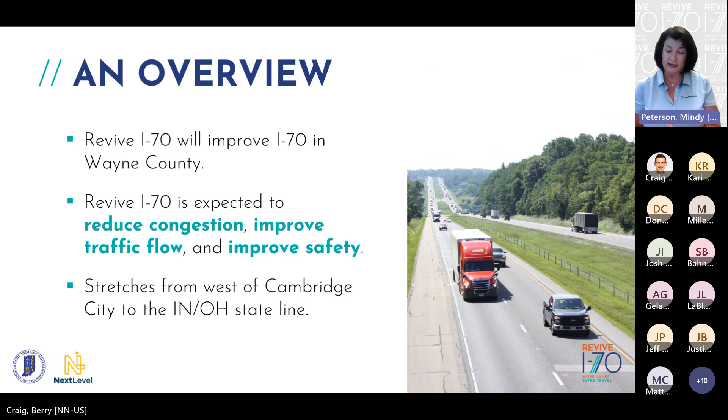So we want to give you an idea of where we are with the project and what we're talking about. When we talk about Revive I-70, we're talking about a project that, bottom line, is going to improve I-70 in Wayne County. So we're talking about added travel lanes, wider bridges, improved bridges, all things that are going to improve your commute, improve traffic flow, and improve safety.

Some of those improvements are outlined right there on your screen. We're talking a lot of bridges in this project area. We said it's a large project area, and we have 41 bridges that have improvements identified, and they kind of run the gamut. We have some really serious ones, a replacement of a bridge. We have some rehabs, some painting of bridges. John is going to walk through what those improvements look like.

And we have a lot of widening. So we're going to talk a little bit more about that added capacity and what it's going to look like, and where we know for sure that an added lane is going to be going, and where we are still identifying improvements. And then other things on the list as well.

We have pavement replacement, we already talked about that. Pavement in this area really needs some attention, and so that is certainly something that our project team has been taking a look at. Drainage improvements, very important. And then just things that are really going to enhance the drive along this corridor: better lighting, signage, guardrail, those barriers. So all things that the team has been looking at.

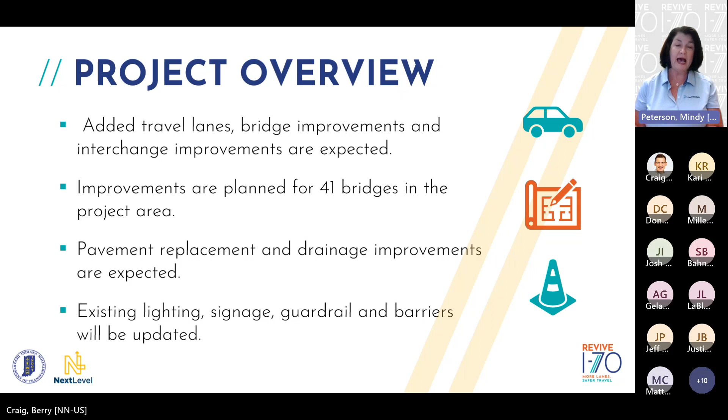Also want to talk about where we are in the project. We're in the environmental and design stage, so we're kind of zooming out and looking at the big picture here. As I said, we started our work in earnest early this year. A lot of coordination is involved with a project of this size. This is a major project, as I said, it's a big investment. That coordination is happening with local, state, and federal officials. I see some of those local officials joining us tonight. I mentioned that we have some federal highway folks with us as well. So there is a tremendous amount of coordination that goes on with a project like this.

Input from the public is important. So please don't shy away from sharing any feedback, using that chat function, or using comments sent to us through the website. That feedback is very important and helps inform the development of this project.

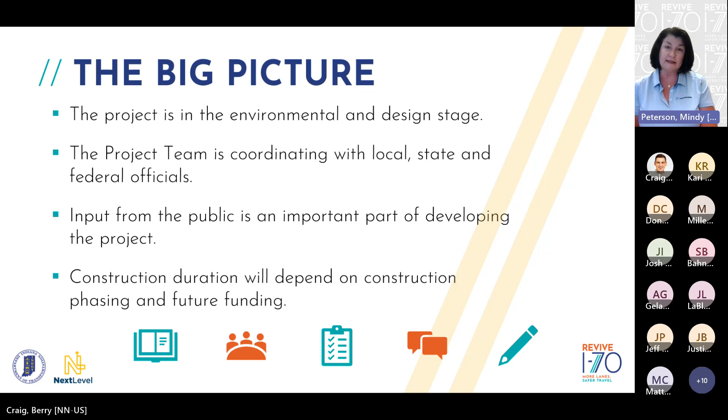Also want to talk about construction. That's a natural question. When we start talking about improvements like this, people want to know how soon, what's it going to look like? So we'll cover that timeline, but really we're talking about construction starting late next year, late 2024.

And when we talk about this project, I've already said it several times, it's a large project area. We're talking about a lot of potential improvements, so it is a lot of ground to cover, and it's a large investment. So to deliver this contract in the best way, get that competition you want, get the interest that you want, and deliver it in a way that lessens the disruption as well, it has been divided into 3 contracts for project delivery.

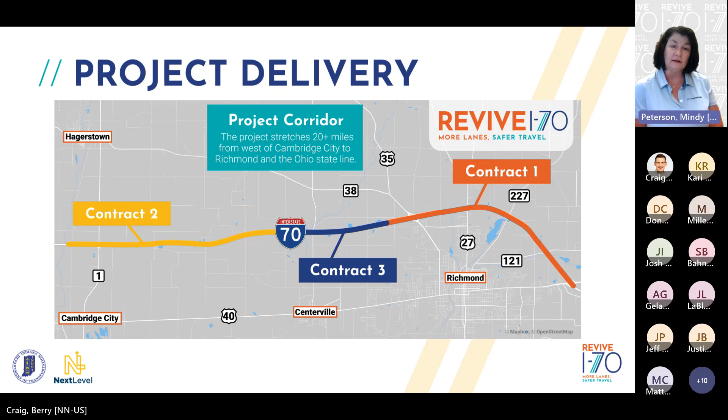And then on that next slide, it gives you a good opportunity to see how that area lines up when we're talking about the 3 contracts. So if you want to flip that for me, Berry, if you don't mind. So we have the 3 contracts, a lot of information on the screen here, but I will tell you everything we're touching tonight, everything we're talking about, is already on the project website.

You're going to find that at revivei70.com. So when you ask what are the limits, what are we talking about, how far do the contracts go, when are these contracts going to let, when can construction begin - all of that information is there.

For contract 1, we have a really good idea about the improvements we're talking about, and these are the things John's going to talk about in detail. We're talking about that very important third travel lane, which will make a big difference for commutes. We're talking about interchange modifications and pavement replacement. That pavement replacement is a big deal - taking it down to the soil, replacing it, making some really serious improvements there.

Contracts 2 and 3, we showed you the areas, but we don't have all those improvements identified yet - still a work in progress. We started with contract 1, really nailed down those improvements, and the other ones are items we're still identifying and working on. With that, it's a perfect segue to John, who's going to walk you through the planned improvements.

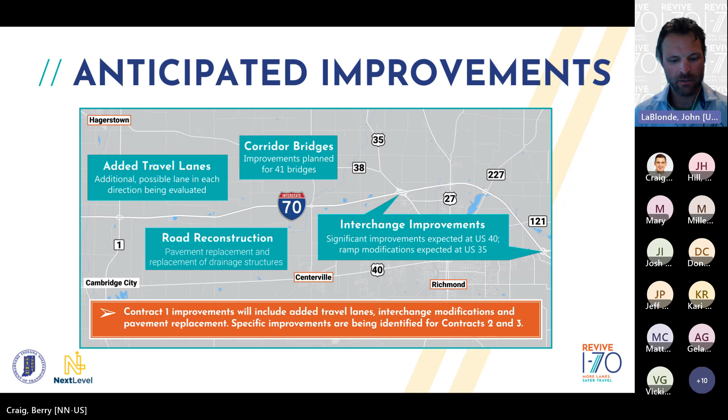Right now that's all grass, and we're going to fill that in. The goal of this project was to minimize disruption to the outside, and therefore minimize the need for right-of-way. So we're going to hold those outside edges of existing pavement and work our way inward. This is how we accomplish buying very minimal right-of-way.

There's a couple pieces of right-of-way we have to look at for culverts, and a little bit near US 35, but that does not disrupt any businesses, does not disrupt homeowners, doesn't take any relocations. So there was a lot of thought process in making sure we try to meet the goal of added capacity and safety without too much disruption to the folks that live around there.

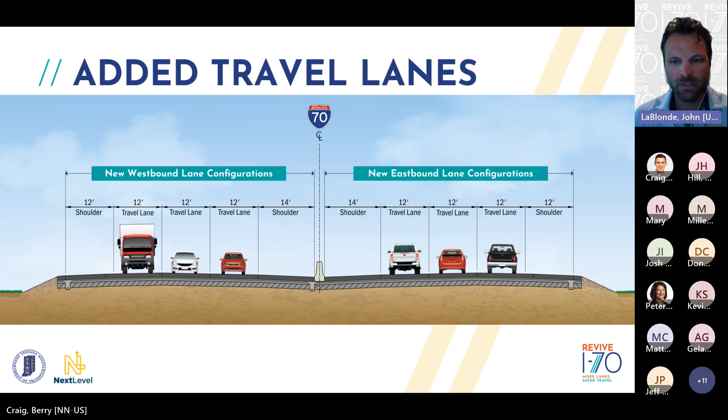So we already talked about the added travel lane - it's going to be a lane in each direction, and it will be in the median. Contract 2 and 3 are still being analyzed for the best course of action, but for what you just saw, that is what we're moving forward with on contract 1.

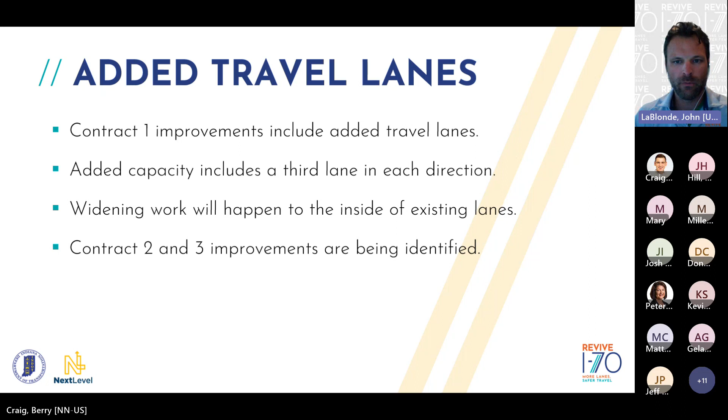Bridge improvements - there's a lot of bridges, like Mindy said. This is for the overall contract, over 40 bridges within the project. Almost all the mainline bridges on I-70 are going to be widened. We're looking at replacing a few of them, but for the most part we're going to widen them, and we'll talk a little bit more about actual bridge improvements on the next slide.

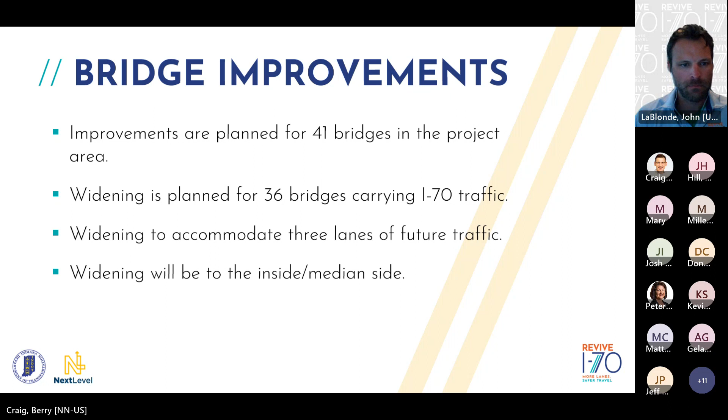This is what you typically see in a more urbanized setting. If you go from Dayton to Columbus, you'll see this typical section. And if you're getting close to Indianapolis, on 465, you'll also see this.

There has been an emphasis on improved safety along the interstate, and the concrete median barrier really has advantages in keeping vehicles on their existing roadbed and not crossing over to the opposite side. So the barrier is definitely an added safety bonus for this project.

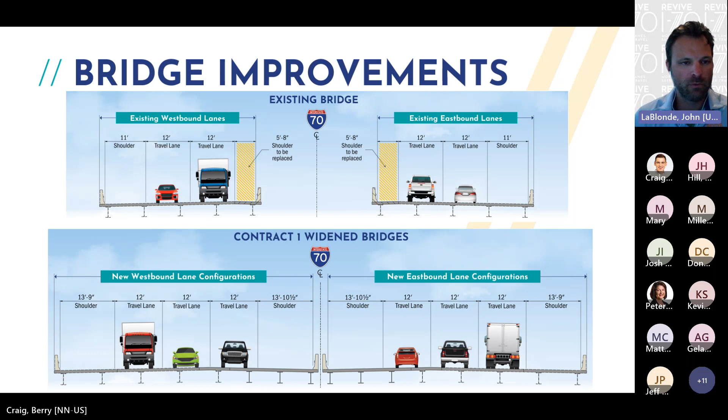So for bridge improvements, we've got quite a few replacements, a lot of rehabs, overlays, and preventive maintenance. What does all this mean? The best way to describe this is bridges are somewhat like a car, where your car needs maintenance—you've got to rotate the tires, you've got to get an oil change. You can't just buy it and be done for the rest of its life. You have to maintain it and make sure it stays in working order. Bridges are the same way.

The deck overlay is very similar. Over time, there will be porous areas within the deck of the actual bridge—that's the top flat part that you're driving on. We'll go in, improve the deck, patch any holes, and then put a new overlay, which is basically a sealant to preserve or extend the life of the bridge itself. And for the major rehabs, we'll be widening to the inside.

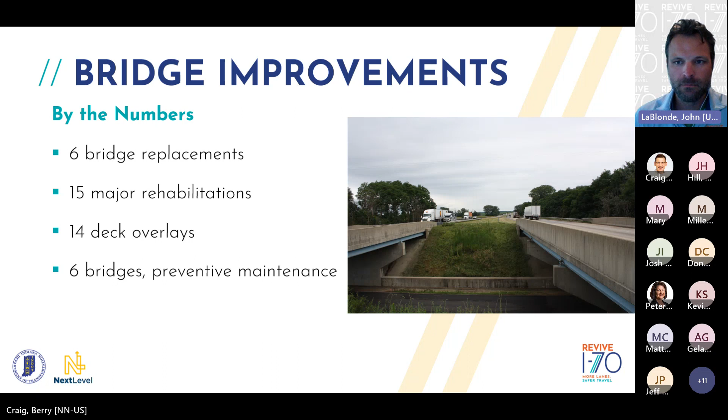Next slide, please. I apologize—so at the US 35 interchange and US 40, we are going to be doing improvements.

These are two major reasons why that eastern end is within contract number one and the first to go out to bid and be constructed. Most of you have driven this section of corridor. If you're going westbound on I-70 and want to go southbound on 35, as soon as you go underneath that bridge, you have to jet off to the right, slam on your brakes, and slow down into that tight curve.

We understand that back when the interstate was built, there were a lot fewer cars, and they also didn't move as fast. There's been a lot of changes that have occurred, so now we need to extend that deceleration distance, and that's what we've done here. This is what you're going to see in orange for the top part of I-70—we're extending that deceleration distance.

So for the westbound exit to northbound and southbound 35, we will actually create its own collector-distributor system, meaning it will be separated from I-70 by a concrete median barrier. Once you've made the decision to get off on 35, you won't be able to cross back onto I-70 and vice versa. This eliminates some weaving movements, which is nice and safer, and also extends that deceleration distance, which will definitely improve safety for this interchange.

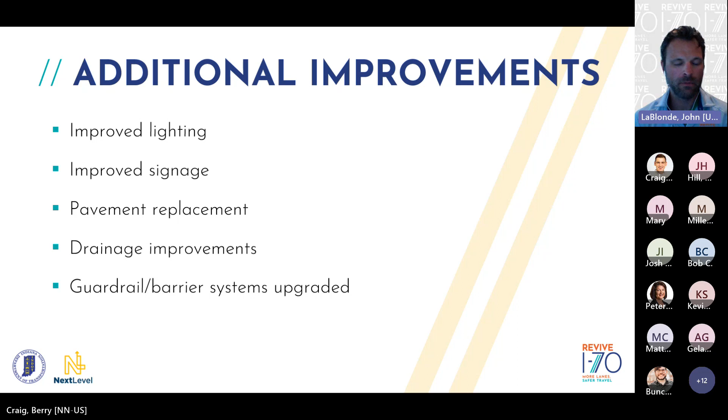And then we'll be upgrading the barrier and guardrail systems, just like I mentioned earlier. Providing that concrete median barrier down the center of the roadway really provides that additional safety between the eastbound and westbound movements.

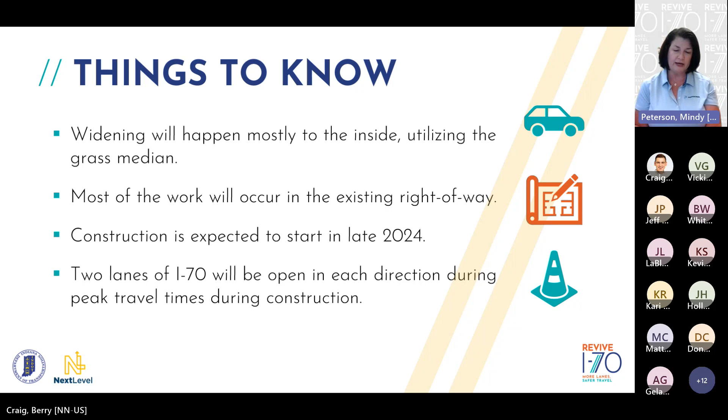There is always a little bit of angst and worry about people getting used to it. There's going to be a tremendous amount of education on the front end, making sure nobody is surprised. They'll know how the roundabouts function, how to use them, and they'll be ready to go when those are up and running.

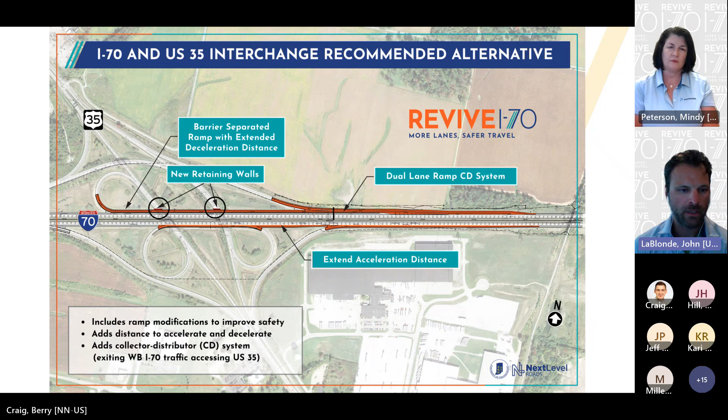Berry, do you mind hopping back to slide 19? That way we can see a visual with an aerial behind it. Our project limits go from INDOT right-of-way to INDOT right-of-way, just a little bit beyond the Indiana-Ohio state line, not quite to the firework entrance, and then before you start getting into town. We will provide sidewalks along the whole corridor for this project. There are other projects down the road on US 40 that may incorporate additional sidewalks, and it would be really cool to see that go all the way into town. But for right now, what you see in orange is where the sidewalk on both sides will start and stop.

A lot of times when these projects come about, we're keeping an eye on where things are headed in the future. Even if plans aren't concrete today, we want to offer opportunities for future coordination and see what possibilities exist. So a lot of this is looking forward when we talk about connectivity. It's better to add those facilities now while we're doing all of it, rather than coming back later and destroying things as you try to improve at the same time.

Mary commented that it seems like a bit of an odd place, which I think is because when people think of the interchange and how it's currently designed, it may seem a little odd. But it's going to function so much differently when it's redesigned and the improvements are made and the roundabouts are in place. It's going to be much different than it is today, and won't seem nearly as out of place at that point in time.

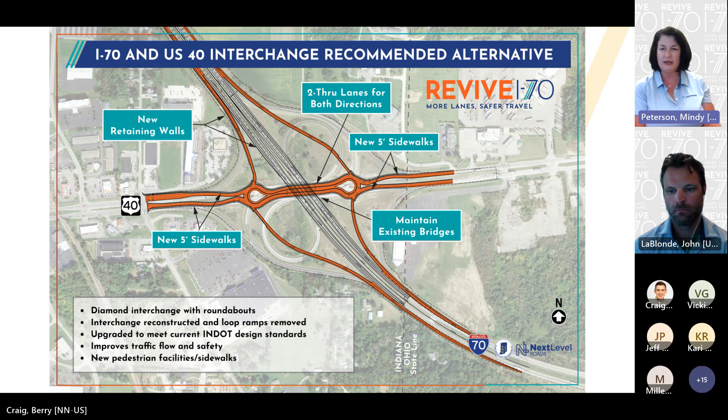On the estimated time frame from start to finish on contract 1, John: we're starting construction late next year, and you'll really start seeing stuff moving in '25 and '26. We're still figuring out the exact time sets, but most likely major completion will be done in '26, then into '27 pavement work will be done. They may have to come back and do a little grading and seeding since you can't get grass to grow in November, so that may need to happen in May or June. But for the most part, you're going to see work in '25 and '26 for contract number 1.